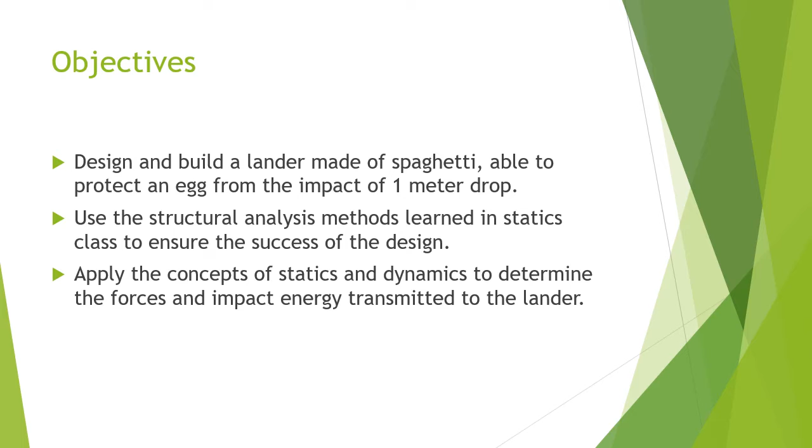The objectives of the project are to design and build a lander made of spaghetti able to protect an egg from the impact of a 1 meter drop. Use the structural analysis methods learned in statics class to ensure the success of the design, and apply the concepts of statics and dynamics to determine the forces and impact energy transmitted to the lander.

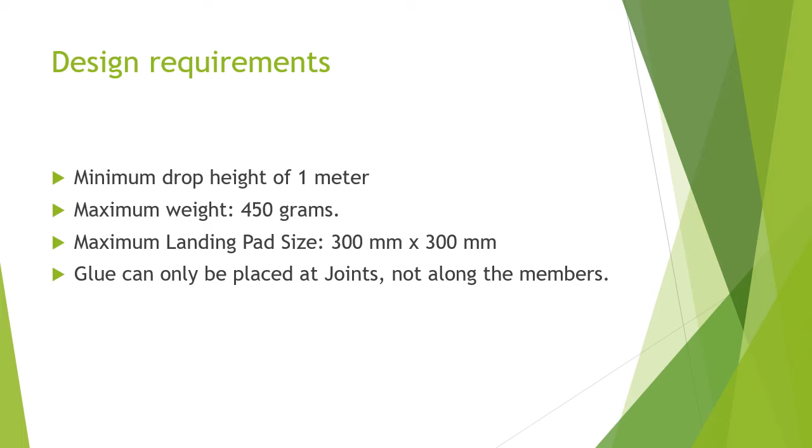The design requirements for the lander are a minimum drop height of 1 meter, a maximum weight of 450 grams, a maximum landing pad size of 30 centimeters by 30 centimeters (300 millimeters by 300 millimeters), and that glue can only be placed at the joints, not along the members of the design.

Brainstorming: the designs of many Mars and Moon landers were reviewed before choosing a final design. Many useful ideas were taken from these devices to ensure the success of the design, including the shape of the legs and where to assemble everything. Also, three preliminary sketches were drawn before choosing a final design.

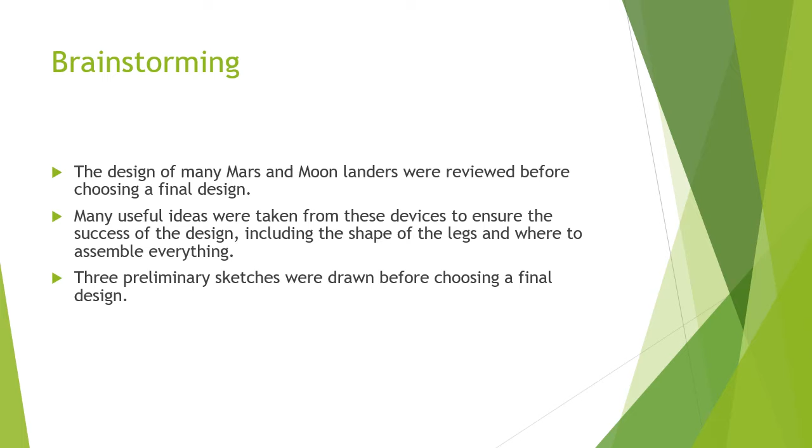From the three real Moon and Mars landers reviewed, the first is the NASA InSight, the first mission to explore Mars' deep interior, which landed in November 2018. This is not a rover, it's just a lander, and it's basically investigating the composition of the soil of Mars, looking for processes that shaped the rocky planets of the solar system more than 4 billion years ago.

The structural design for this landing device is composed of three main legs. Each leg has two supportive shock absorbers, and you can see that the leg is placed a little above the shock absorbers, and this has some implications that we will see in a moment.

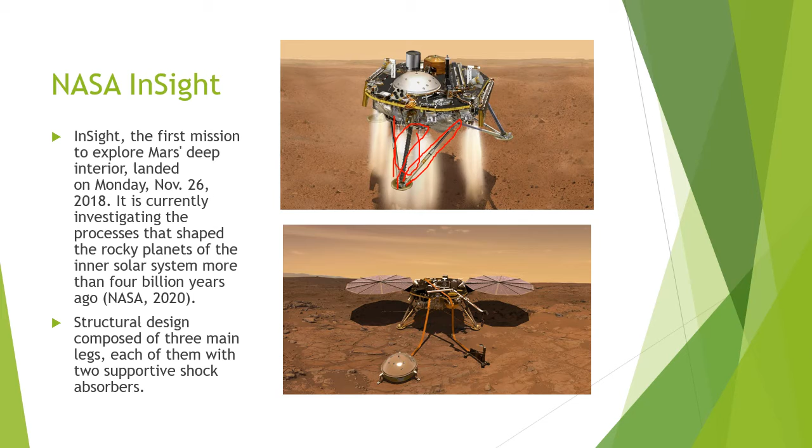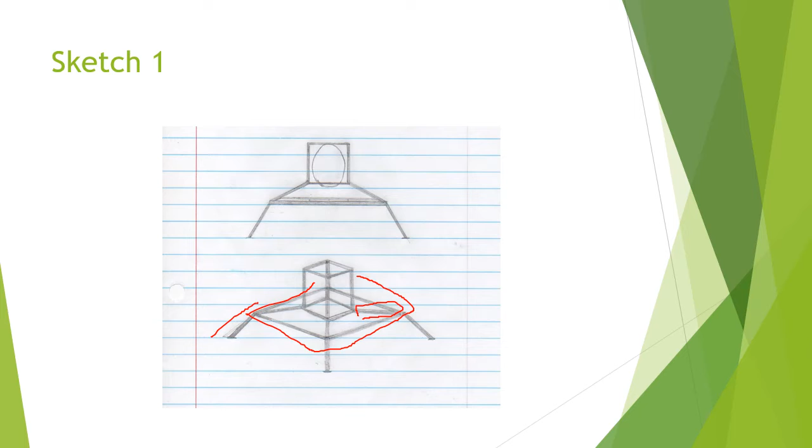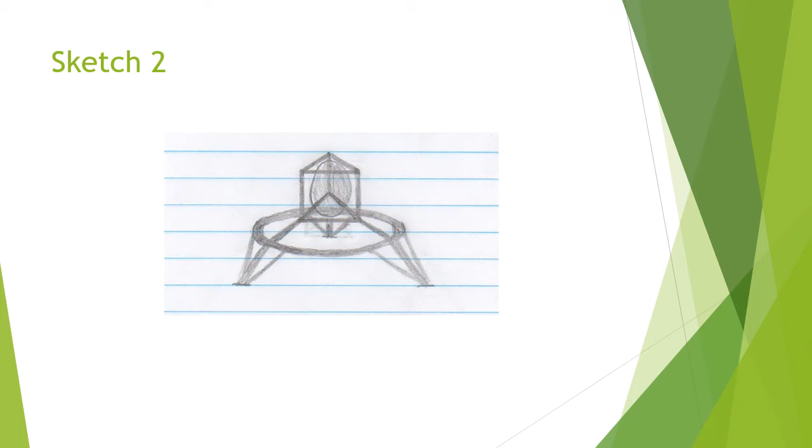Sketch number two is basically similar to the InSight mission. It's like a circle, and then it has three legs, the main leg and the supportive legs. This time the jail for the egg is triangular, like a prism, and it's a little above the circle. However, this was disregarded almost immediately.

It would be very hard to actually mold the spaghetti into a circular shape. It could be done, but it's very hard and not necessary. Finally, sketch number three is the final sketch I chose for the design, and very good results were obtained, because it's similar to sketch number one, but instead of two frames, it has two square frames connected by small members, allowing them to be placed one above each other.

The egg is placed in the middle of the jail, connected by members here and here, more members than in sketch one. Also, the legs are two legs, one above each other, giving the design some stability and a very nice force cancellation concept that I'll explain in a moment.

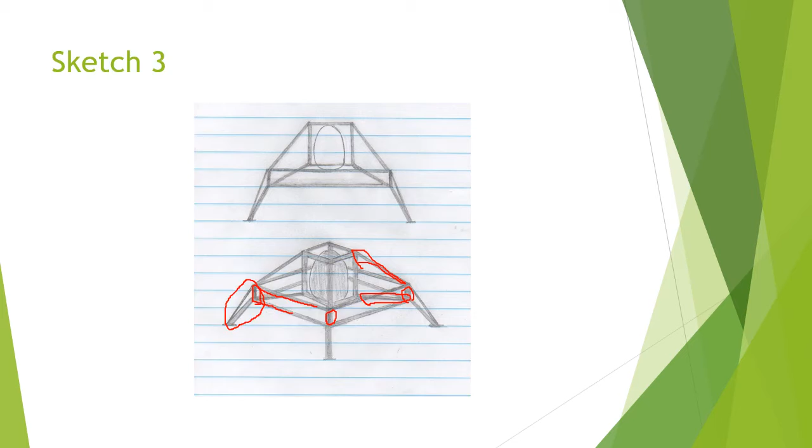So this is what I was talking about. Imagine the normal force of impact acts vertically. To counteract this vertical force, the leg in the lander will create a vertical force downwards. So a force in the member will be created, and because the y component is exactly equal and opposite to the normal force, this member will be in compression.

So you can take it like this: this pushes the member, and the member needs compression. But there is also another leg here, and its member also provides a compression force decomposed in the same way in the z and xy plane. So the impact force creates a force that goes like this, and the member is compressed, creating another force that pushes the member in that way.

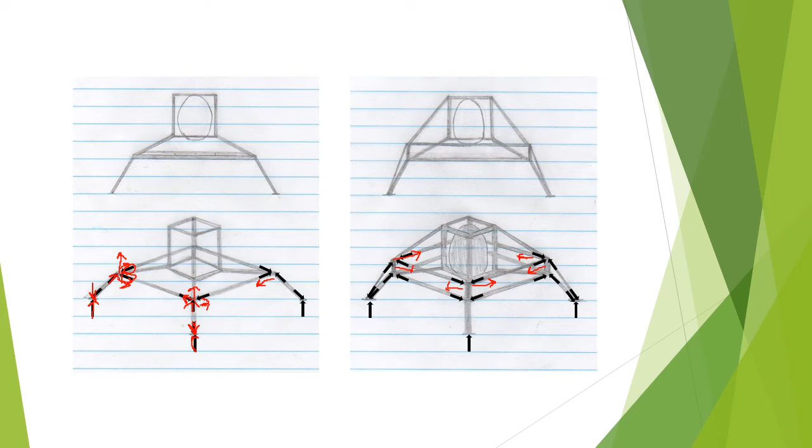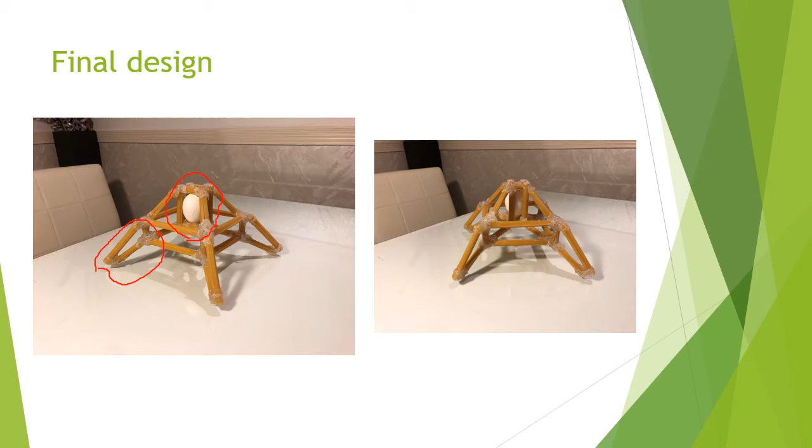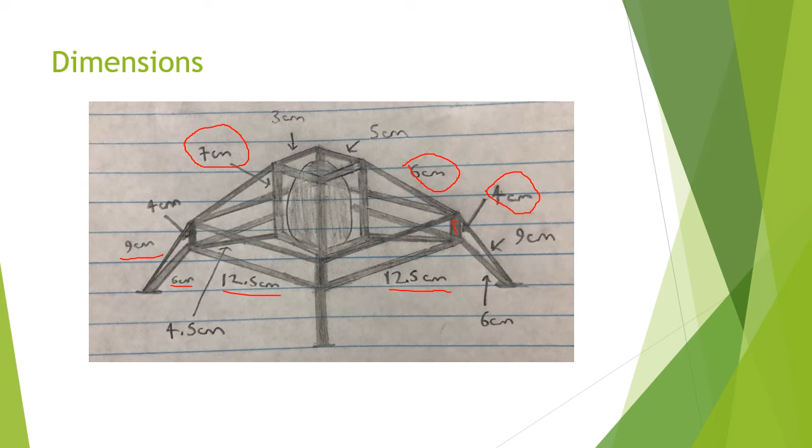The upper leg is 9 centimeters, the lower leg is 6 centimeters, 12.5 centimeters here from the sides of the frames, and the height of the jail of the egg is 7 centimeters. The part of the square above the egg is 5 centimeters and 3 centimeters. Finally, we have 6 centimeters for this member that goes from the structural base to the top of the jail, and 4 centimeters for this member that acts as a support for the second square frame.

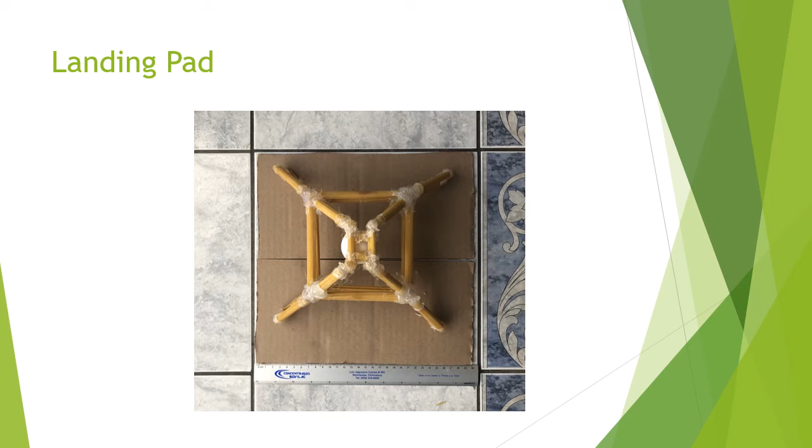So the lander was placed in the landing pad. This is a 30 centimeters ruler, so it fulfills the requirement.

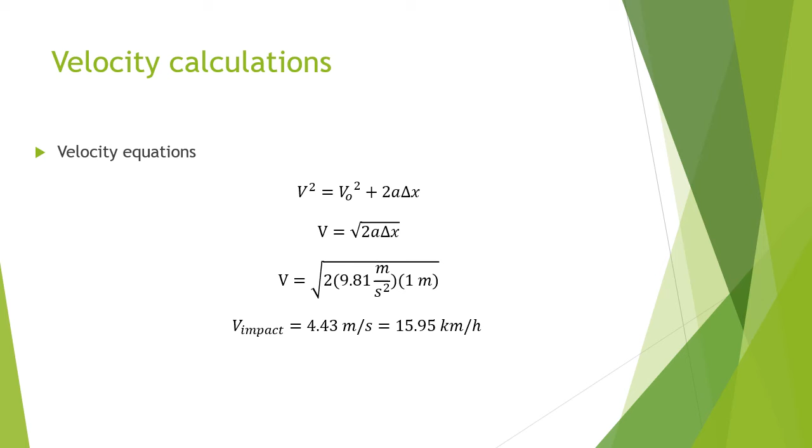For the velocity calculations, I just applied some kinematic equations, and I got 4.43 meters per second, which is equal to 15.95 kilometers per hour.

For the normal force, to determine the normal force transmitted to an object moving at a certain velocity in a collision, you need to either have the distance the object travels before stopping, or the time it takes for the object to stop.

Since it's really hard to determine the actual collision distance, because you cannot determine it with the soil, you would have to determine the deformation of the soil, so it's basically impossible to determine that.

So since we cannot get the collision distance, the time interval was estimated using the slow motion video recording capabilities of a cell phone, an iPhone in this case.

According to iOS, the slow motion videos are recorded at 240 frames per second, and by watching the video frame by frame, it was determined that the whole collision of a 1 meter drop took place in 10 frames. This led to the following calculations.

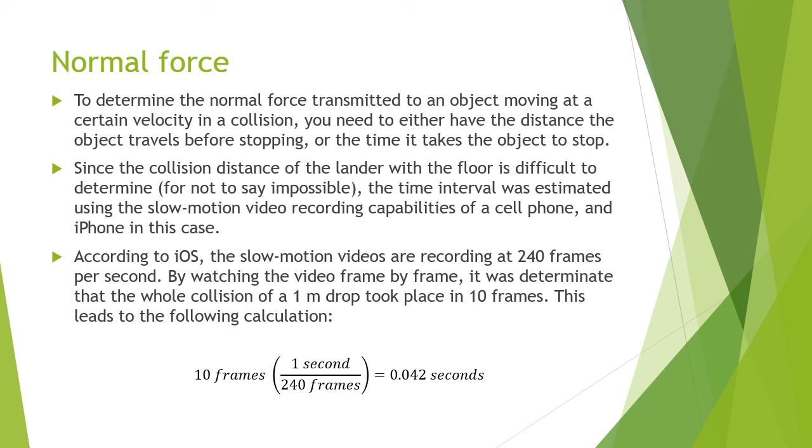By doing the conversion, 240 frames per second, we get that the collision took place in 0.042 seconds. By placing that value, we get the acceleration and the force, using this method I will show in a moment.

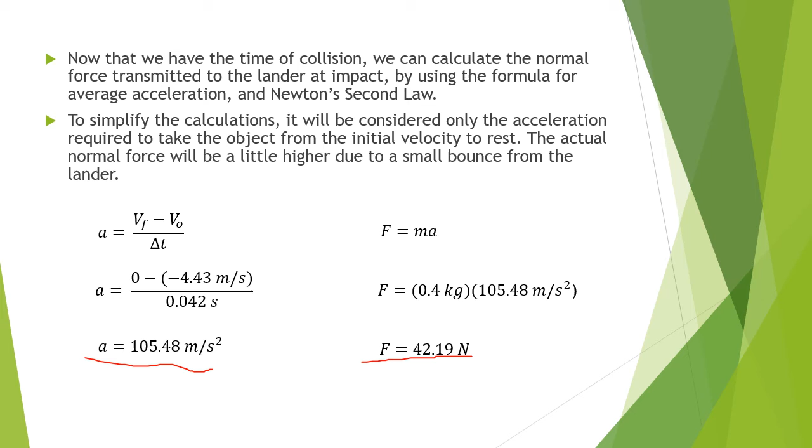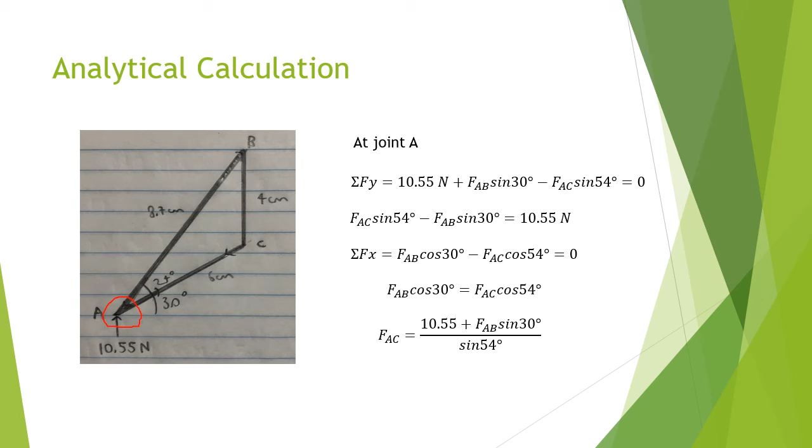For the analytical calculation, after doing the method of joints here in this joint, applying it, we get these equations, and we get the force in member AC to be 22.463 newtons in compression, and the force in AB to be 15.246 newtons in tension.

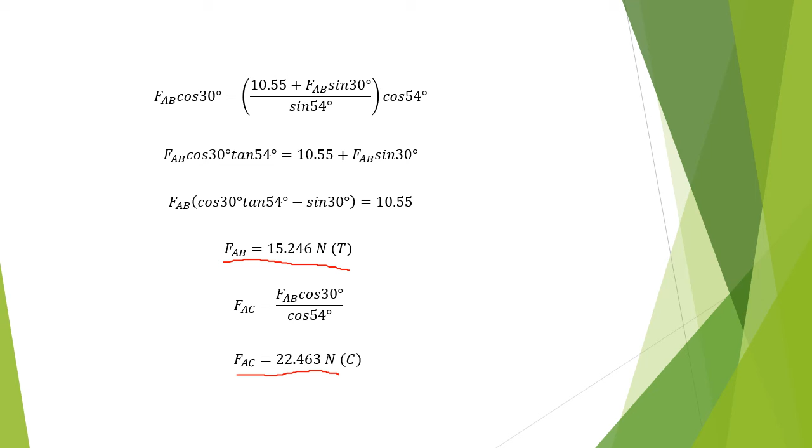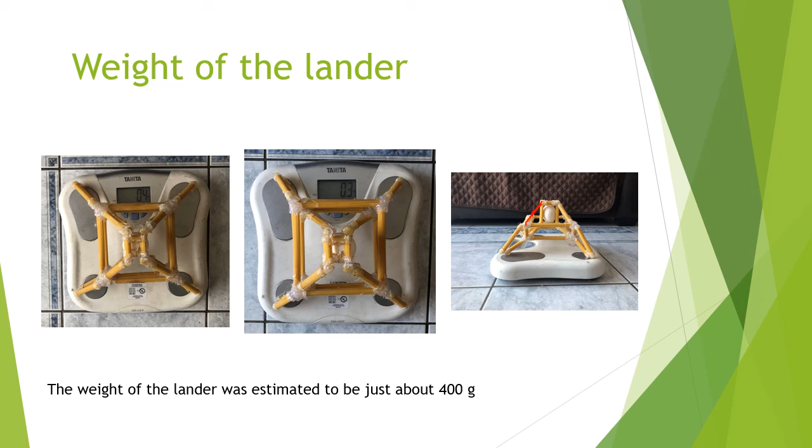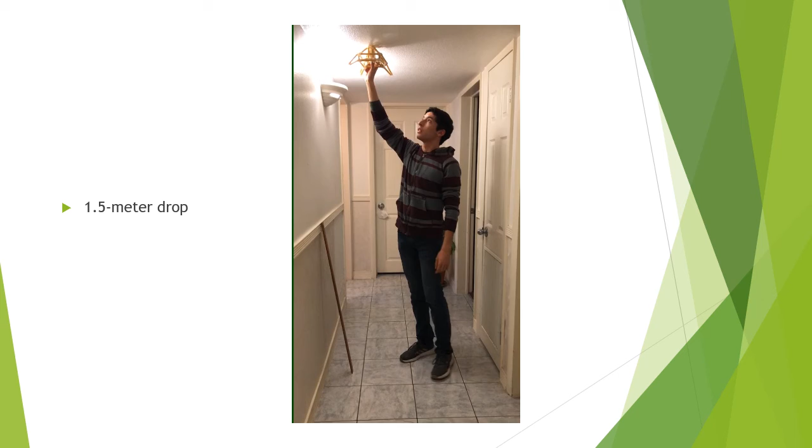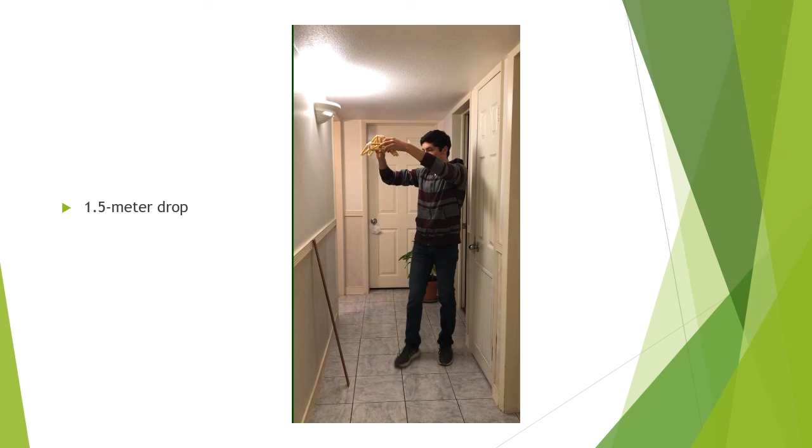Then 1.5 meter drop. This is the second test. It's like the height of... well, actually this is like a meter and a half. So the egg still didn't break. This is the second test.

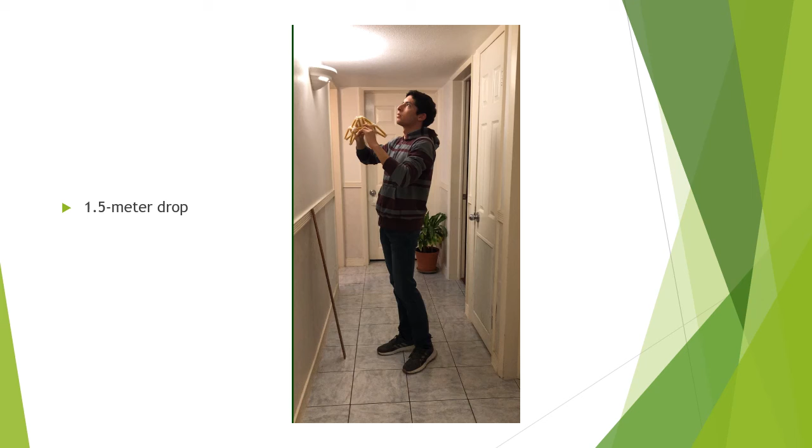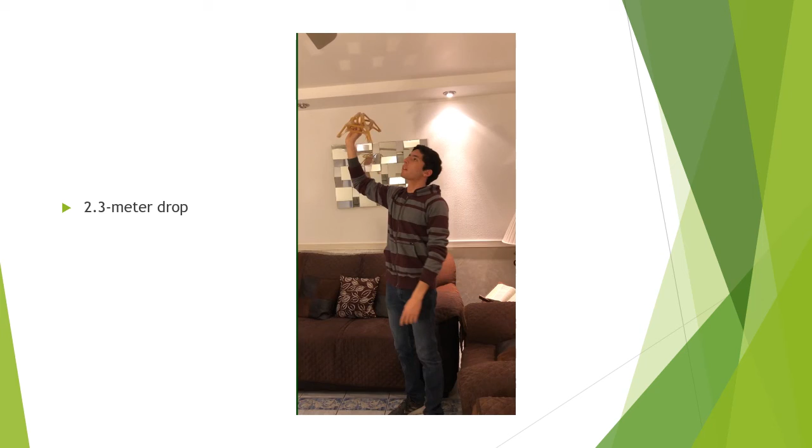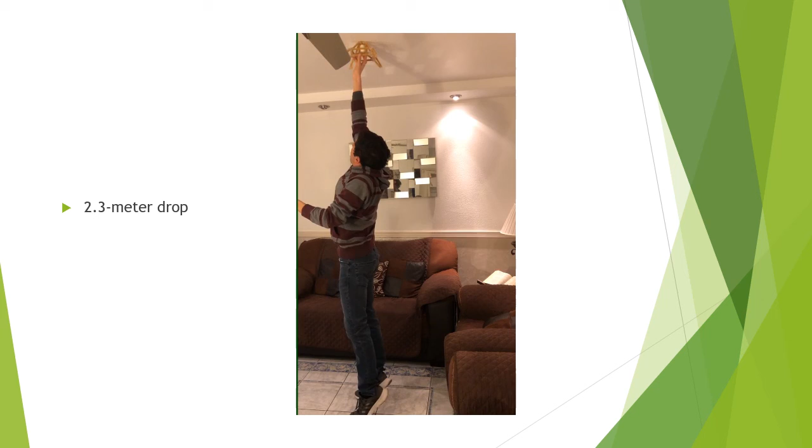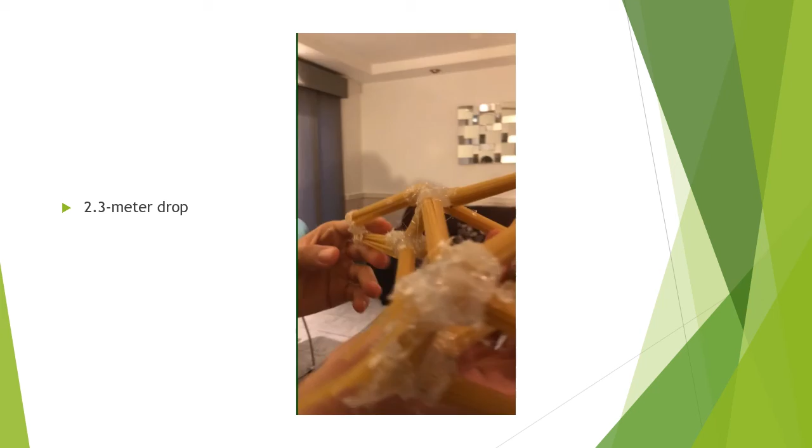And finally, the final test I did was from 2.3 meters. This is the third test. Is it higher? The roof is a little higher in my house. It's 2.3 meters, let's see. Okay, so the model is half broken, but the egg is perfectly fine here.

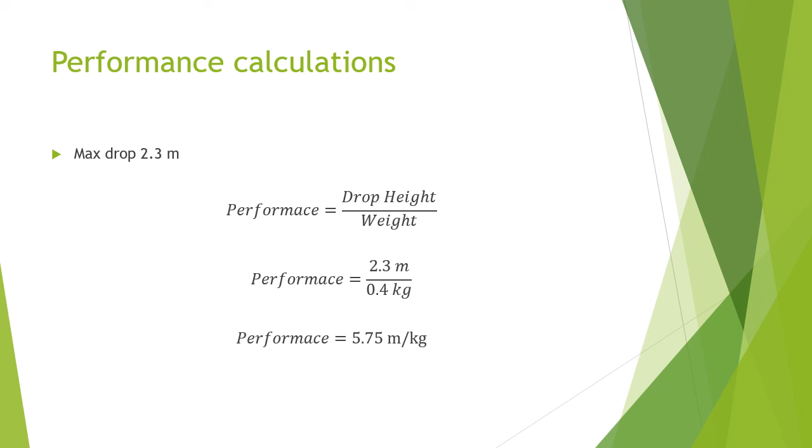So pretty good results were achieved. This is the maximum drop distance I could afford for the egg. So for the final performance, I registered 5.75 meters per kilogram.

Conclusions: the lander build met the design requirements, with a weight of approximately 400 grams and a size less than the 30 centimeters by 30 centimeters landing pad.

The lander met and exceeded the performance requirements, being able to withstand a drop from 2.3 meters without breaking the egg. The impact force transmitted to the lander was calculated by estimating the collision time of the lander with the floor. Using the impact force, the forces transmitted to one leg were calculated using the method of joints, determining the tension or compression each member is subjected to.

For further improvements in the design, I will reinforce the legs more to avoid breaking, because on the 2.3 meter drop, the legs were the part that broke, not the structure itself with the jail of the egg. So having more reinforced legs will help.